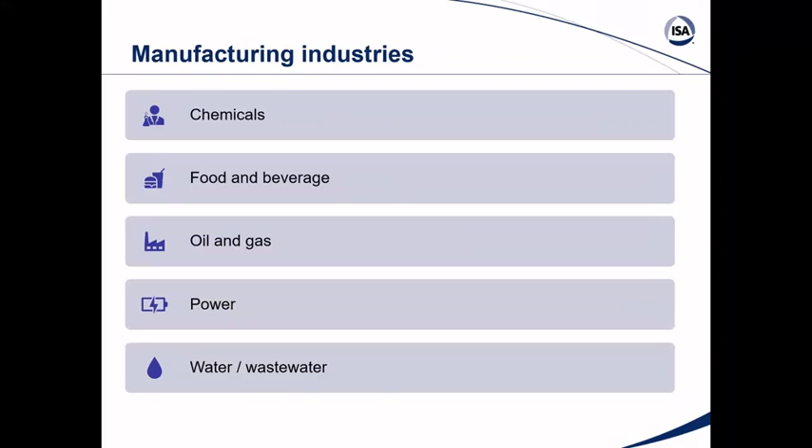We develop cutting-edge resources on topics like asset management, enterprise integration, control systems, cybersecurity, instrumentation, plant maintenance, and safety.

ISA certification provides an objective third-party assessment and confirmation of a person's skills. ISA currently offers 2 certification programs, Certified Automation Professional and Certified Control System Technicians. ISA offers 3 levels of the CCST certification, requiring differing degrees of technical experience, education, and training.

ISA also offers 2 certificate programs, the ISA IEC 61511 Safety Instrumented Systems Certificate Program and the ISA IEC 62443 Cybersecurity Certificate Program. The ISA brand family exists to serve automation professionals and their companies and includes Automation.com, the Automation Federation, the ISA Security Compliance Institute, the ISA Wireless Compliance Institute, and finally, the ISA Global Cybersecurity Alliance.

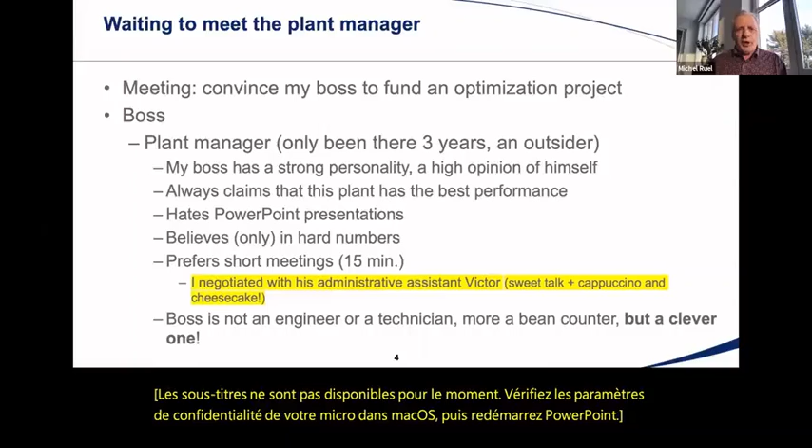I decided to present today differently, just so we change. We do so many Zooms, Teams, and so on that I wanted to do this differently. So what I will do is I will present a project to my boss. I am waiting for this boss right now. I want to convince him to fund an optimization project.

So the plant manager, Mark, is an outsider to our plant. He came here 3 years ago. He has a strong personality, a very high opinion of himself. He always claims that this plant has the best performance among our group. He absolutely hates PowerPoint presentations. He believes only in hard numbers. He prefers short meetings, usually 15 minutes.

So I convinced his administrative assistant, Victor, with a sweet talk, cappuccino, and cheesecake to get 30 minutes with him today. My boss is not an engineer, he is not a technician. He is more like a bean counter, but a very clever one.

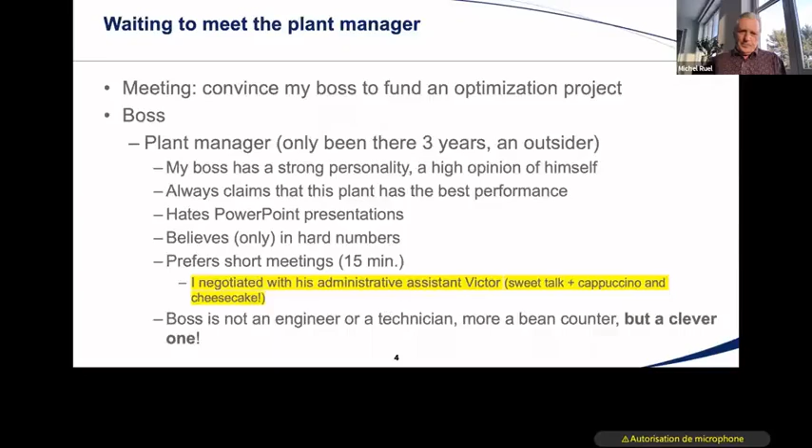So with him, you have to go straight to the point. You have to be prepared. If you present a PowerPoint, it has to be very short. No technical words, no buzzwords, no acronyms. He especially hates control loop, PID control, advanced control. So with him, I stick to simple words like control system.

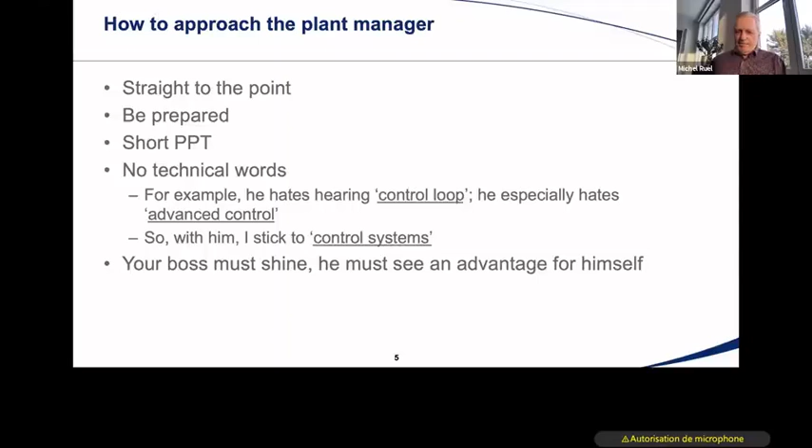Then, when you present a project to your boss, he must shine. He must see an advantage for himself. So just myself in this plant, in my role today, I am the process control engineer, I am the quality manager, I am the instrumentation team leader, I am the electrical engineer, and so on. Many hats, but process control is my baby.

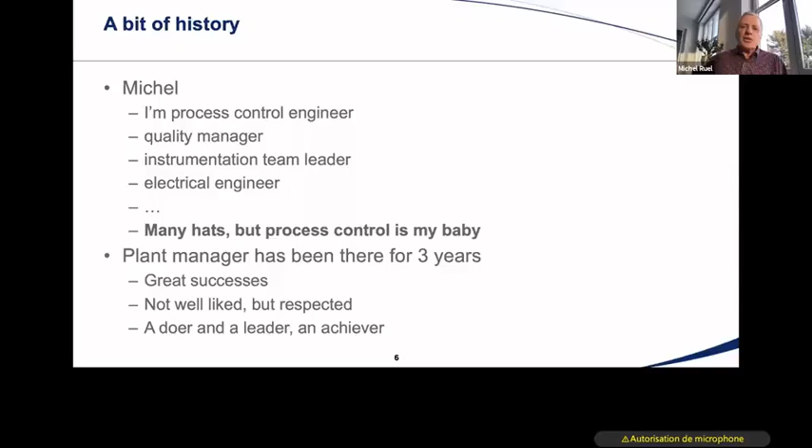So the plant manager, like I said, has been here for 3 years. He had great successes. I will not say he is well liked, but he is respected. So he is a doer, he is a leader, he is an achiever. That's the type of person I will be discussing.

Now, you will see on the slides what I have in mind, what I plan. My boss will not see this. My boss will hear what I am telling him. But you will see on the slides what I have in mind.

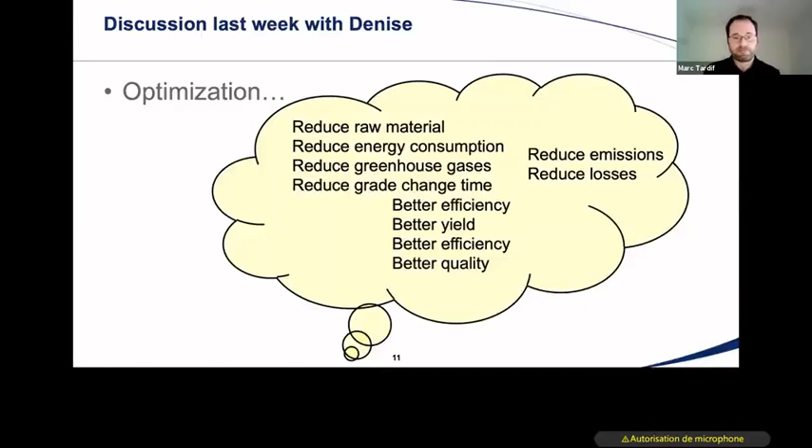Yeah Michel, that's all good questions, but we've been there, done that already. Yeah, but you promised me 10 minutes, so let me present my idea. I had many other questions, but Denise told me, you know what?

We discussed optimization and I thought about our grade changes. Since 2019, we are producing smaller batches, so we have to change grade in the furnace more often.

And during each grade change, we are losing production. The quality is off spec, so we have to reprocess that material. Every grade change, we have between 65 and 75 minutes of losses in production. If we can reduce this time, it will be pure profit because we will produce a little bit more, less manipulation, less reprocessing.

Well, that's easy to tell, but can you prove what you claim? Can you put numbers on your nice story? Can you come back to me with a precise project that I could present to our head office?

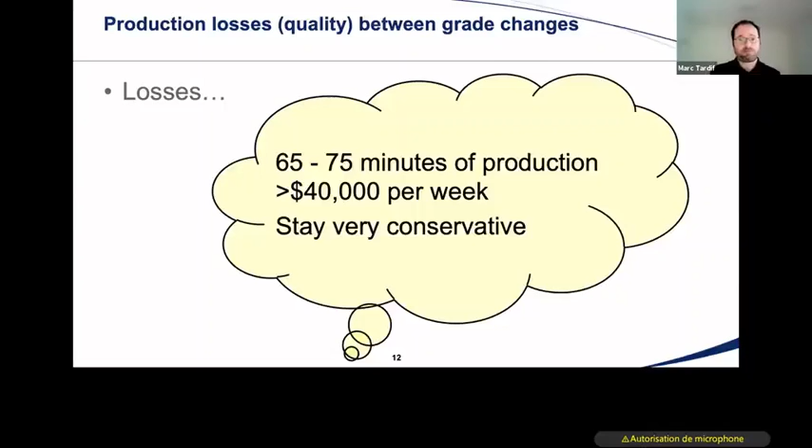Boss, we have been working together for 3 years now. If I come to you, I already have the numbers, I already did the math. So if we can reduce the grade change from 50 minutes to 25 minutes, we will reduce the losses from 30,000 to 15,000.

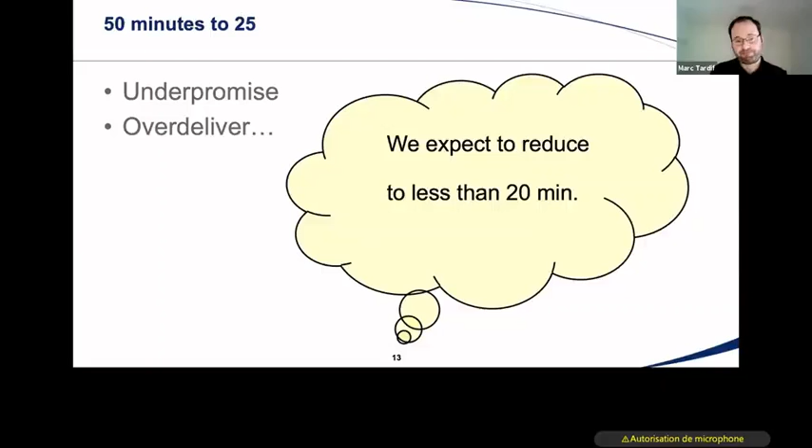Yeah, but why has it not been done before, Michel? Can you tell? You know what - few people, few managers, few process engineers understand process control. Remember, this is my bread and butter, this is my baby. I know simple tricks, very simple tricks.

For example, if you know the dead time for a process, you can predict the settling time for this process. Michel, I have no clue what that is. My understanding is that right now it's dead time for me - I have no clue about settling time, dead time, and all that stuff.

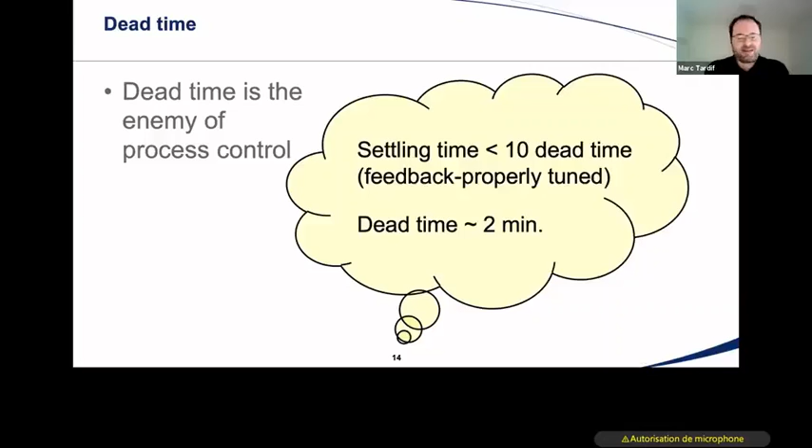Let me explain something very simple. I know that you like biking. So when you ride your bicycle, when you start to pedal, you have like 1 second, maybe 2 seconds before you initiate the movement. This is like inertia, this is what I call dead time. What I call settling time is the time to reach a steady state.

For example, when you ride your bike, you start to pedal. After 1, 2 seconds, you start to bike. And after like 6, 7, 8, 9 seconds, everything is settled - so that's settling time. That's how I based the basics of the estimate to improve the furnace.

So the inertia, the dead time for the furnace is like 2 minutes. If we can improve the tuning using properly the equipment already there and adding a little bit more information to the system, like feed forward or so on, we could improve the system.

Yeah, but just don't try to embarrass me with magic words and numbers. Sorry, boss. So what type of car do you drive?

Well, you know, I have this nice Mercedes AMG. Okay, so you have an intelligent cruise control on this Mercedes. Yeah, sure, sure. This intelligent cruise control, what they did, they use a cruise control system and they added more information to it, like LiDAR, cameras, and so on.

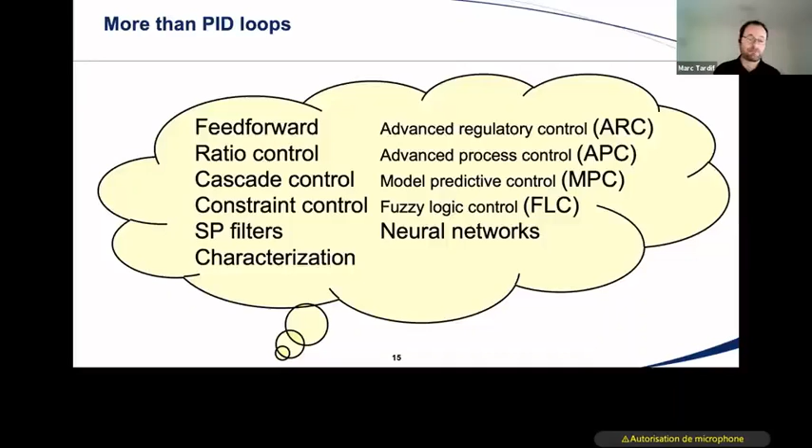Okay, okay, I understand. But please don't tell me that you will ask for new material or fancy programs that nobody will understand. No, boss, nothing like that.

So what I have in mind is very simple. We will measure actual performance. We already have the data, we don't have to add anything to this. We will do a project, which is process control optimization to optimize production. After that, we will measure new performance. We will compute generated profits, and then I will compute my bonus.

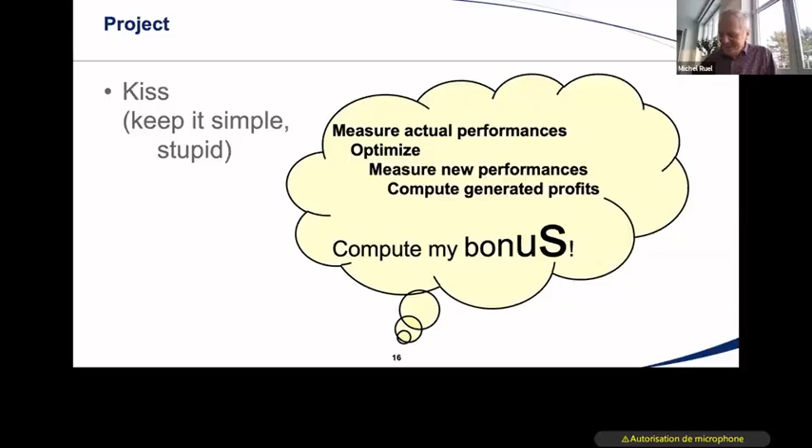Your what? Bonus? My bonus, let me explain. So if this project is successful, we will generate like 15,000 per week. You will shine, the production manager will shine, the head office will be very happy. Nobody will know about me and my team. So we will work behind the scene. So maybe forget the bonus, just an increase in my pay, and I will be happy.

Okay, okay. Well, Michel, you had my attention, as I understand it now, you're trying to present a PowerPoint. You know that I don't like PowerPoint. I know that you may call it a presentation or anything, but I know it's a PowerPoint. It's a nice trick, but it's been there before. Okay, so will you agree on a 10 slides PowerPoint, no visual effect, nothing fancy, as plain as a financial report? Okay, okay, go for it.

Okay, so now I have the same presentation for Denise, Tim's, and the others. So, boss, don't be surprised. You will see a little bit of technical words, but I just wanted to use always the same presentation. If you don't understand some words, just don't look at it. So the numbers and estimates are very conservative.

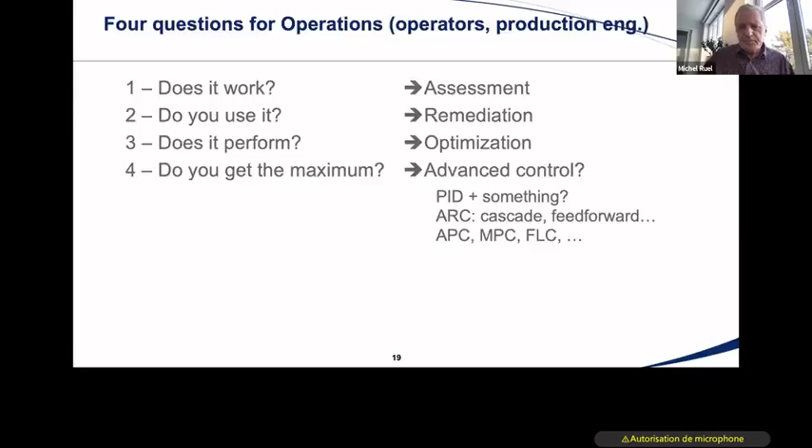In our project here, it's very simple. So the project is, we have 76 pieces of equipment to look at: transmitter, valve, variable speed drive, and so on. And we will do this in the maintenance budget. We did not calculate an extra budget. Believe me, boss, I am also responsible for this budget. At the end of the year, I won't ask for an extra budget.

We already have the budget to do it. Now we have 11 loops and control strategies. The preliminary work in our case is very small. In some projects, we will need 2, 3, 4 weeks to prepare the project. In our case, we have been working on our documentation system and our historian in the last year.

Especially because you asked always for good data. So our historian is in good shape. All the signals are scanned once per second, no compression. We have the real signal all the time. Our documentation system is updated. Our P&ID are updated. Our standard operating procedures are in order.

So we are, I would say, not lucky, but a little bit lucky because we did our homework in the last years. Now the assessment: 75 hours to review each piece of equipment, 140 hours to remediate, repair, calibrate, configure, and 33 hours only for optimization.

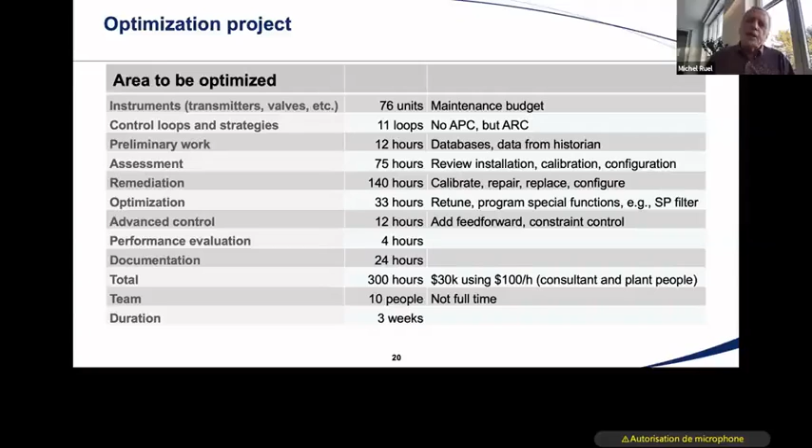So the material, we will replace 1 valve, 1 variable speed drive, repair a few instruments, again from the maintenance budget. We have 1 consultant to coach us to ensure that we do the right steps at the right moment, 30 hours. I asked Denise to have Tim with us.

Tim is our best trainer. Tim will be the salesman to the production people. He will work with the operator. He will work with the production engineer to ensure that they work with us, they understand what we do, and they will buy the project.

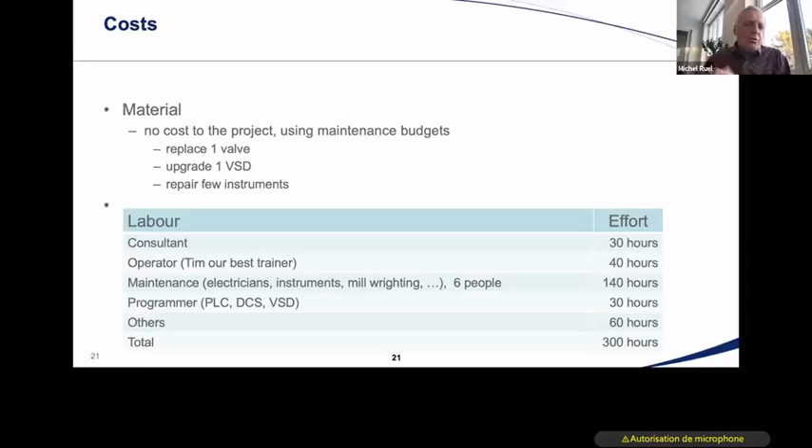So we need a few maintenance people, a little bit of programming, others, total 300 hours. Now the preliminary work, that's why I said we are a little bit lucky because we are very well organized here. We did projects in other parts of the plant, or in another plant, where it was not the case, and it was really a pain to just collect all the documentation, all the data.

In our case, we are very well organized. So we will prepare a database for the assessment, for the remediation, for the optimization. We will document everything. At the end, we will update the P&ID, the management of change, and the SOP. Everything will be done properly.

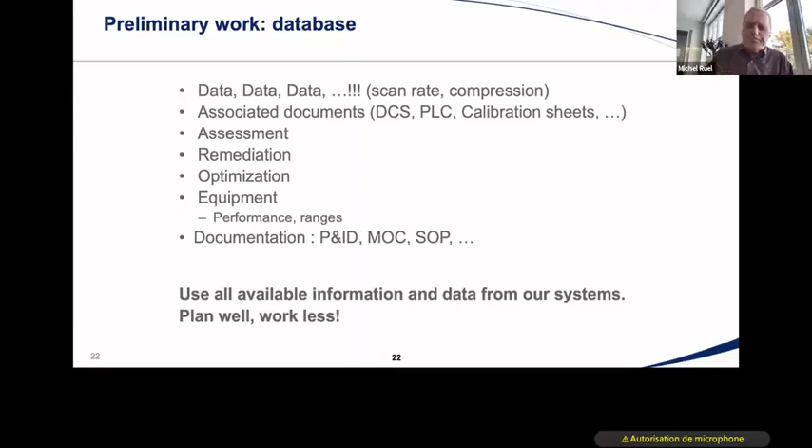Then we will do the assessment. The assessment is visual inspection, configuration, analysis using historical data in the PI system, and analysis using special software. For example, for the flow meter, we have a program to analyze the performance of the flow meter.

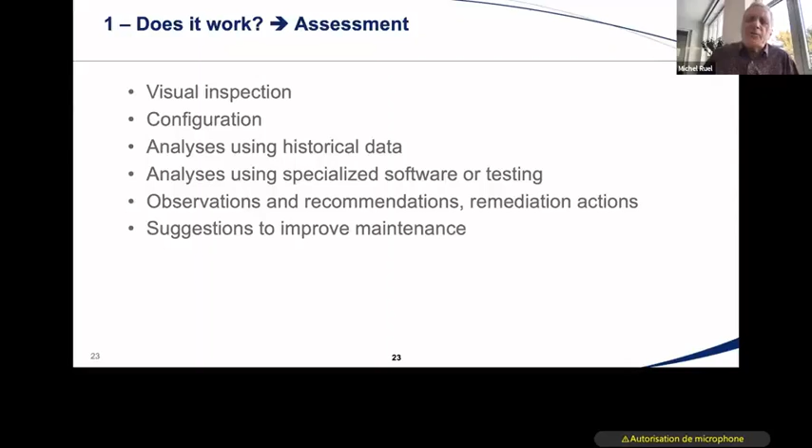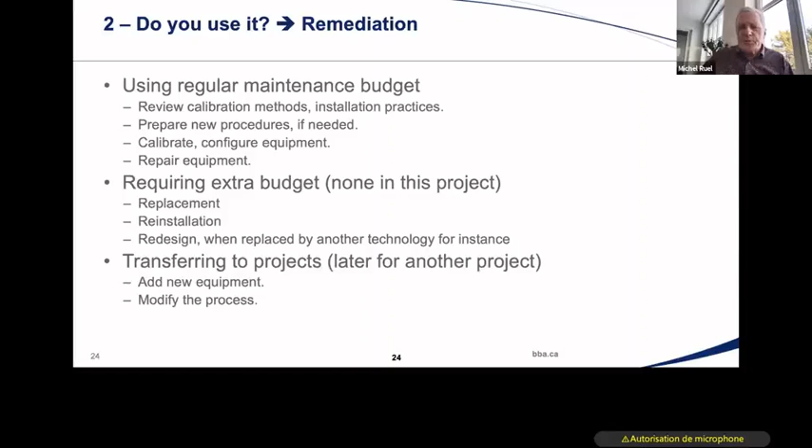So now optimization, we will select properly the criteria to retune the loop and work on this. Now we are a little bit lucky again. Every time we have a grade change, we change the set point in the system.

And a set point change is a disturbance to the process. With that disturbance, we have software to model the process and retune the loop. We won't have to bump test. We will just use the set point change. That will be enough. And since all the data is in the historian, we can even use the past and use a set point from 3 weeks ago to retune a loop, for example.

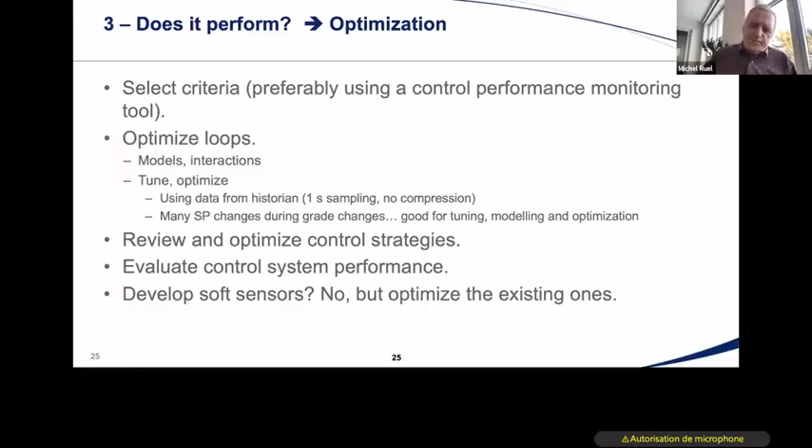We will review the control strategies. We won't develop soft sensors, but we need to optimize a little bit the 2 existing ones. And at the end, we will consider APC to improve, stabilize, handle constraints, and so on. We decided in this project not to add new advanced process control, but we will use advanced regulatory control, which is PID plus feed-forward, cascade, and constraint control. In our case, feed-forward and constraint control.

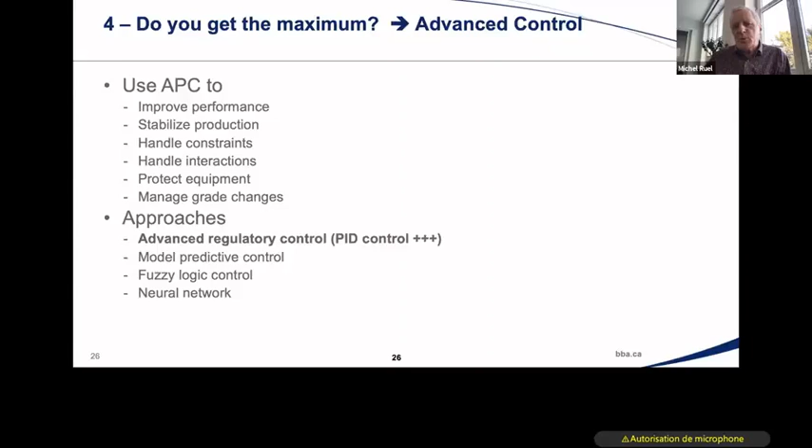Now, the most important step that people will neglect, we will not neglect: documenting properly everything, not only the documentation for the plant, but the performance measurement before and after. We will present results. I know we will be successful. We will spread the good news.

We will congratulate the team. We will write in the newsletter for the plant. We will write about this project. And if it's well planned, the results should be better than expected.

So, boss, what do you think? Well, that's good stuff, Michel. I really like that. You know what? I agree on the spot to let you execute the project, but you have only 3 weeks to do it, and then 3 weeks to evaluate the performance, and you start next week. So I'm out of here. Now, Michel, by the way, just remember that success has many fathers, but failure is an orphan. Good luck. Thank you, boss.

We'll do it. So, as you see on my PowerPoint, I was not planning to do it that quickly, but we will do it. So,

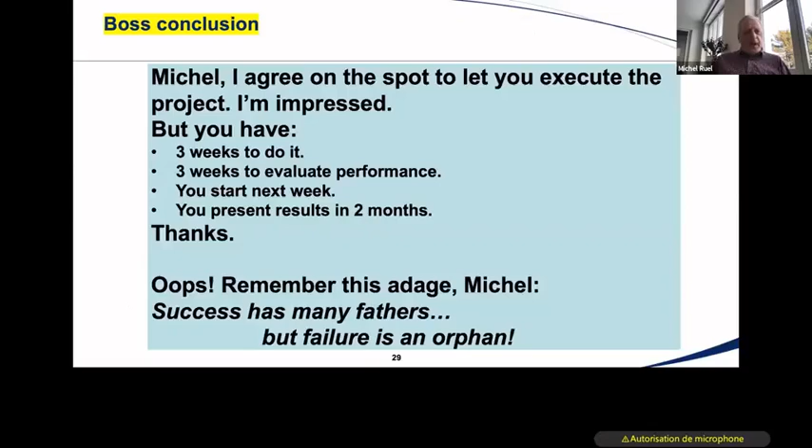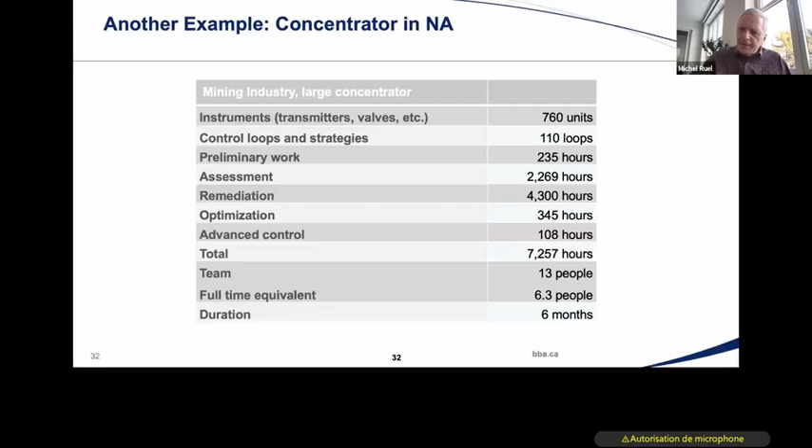Conclusions. I will present 2 other real examples that have been done in other plants, larger, bigger projects, but you'll see it's the same idea. In this project, it was like 7,000 hours, 13 people, 6 months. It was a whole plant that we redid like that. You'll have the PDF of this PowerPoint, so I won't go into detail on each.

This next example here is 40,000 hours. It lasted, in fact it was planned for 18 months. It lasts a little bit longer, but it's exactly the same steps, exactly the same idea. You have to have a very methodical approach.

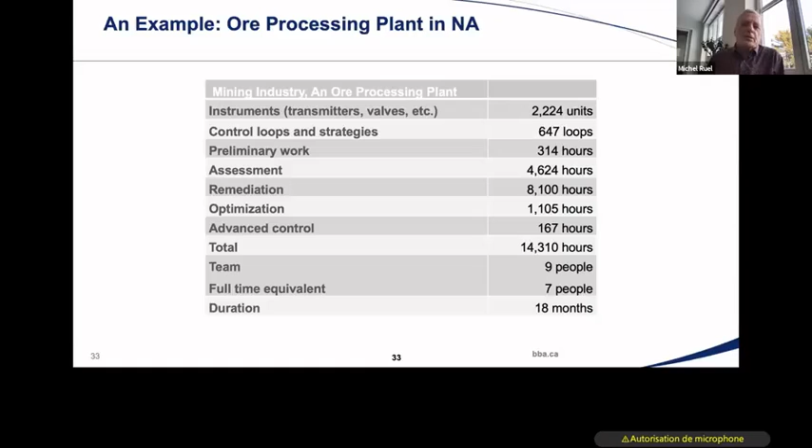So now, what is optimization? It could be to improve productivity and efficiency, higher yield, reduce unplanned shutdown, improve the stability of the operation. But if you do a project to improve stability, it's not easy to get hard numbers on this. So the first project you do in your plant or with your customer, ensure it's simple, easy to explain, easy to sell, but also easy to demonstrate the benefits.

It could be for maintenance, though again on the maintenance side it's not so easy to demonstrate the value, like equipment lasting longer, standardize management of control strategies, simplify troubleshooting. It could be from the energy and environment side: lower energy cost, improve yield, reduce emission, reduce consumption of raw material, improve safety. Improve safety is very nice, but it's not easy to get numbers for this. Same thing for quality: better quality, improve quality control, standardized procedures. It's not so easy to explain or present numbers from this.

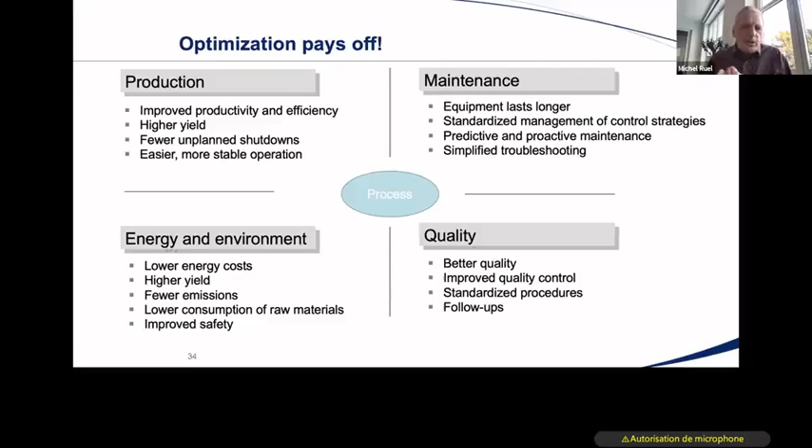So now remember, before adding new equipment, new software, new control strategies, it's a lot easier to optimize. A very simple definition of optimization is to use properly what you have in your hands. This is not expensive. Make it work and perform.

So step by step, 4 steps plus the preliminary. Do not underestimate documentation. Depending on the state of your plant, it could be really difficult, just for example, to retrieve the calibration sheet.

Communicate, explain. Don't be shy to present results. If you have a great success, don't be shy, don't be humble. It's time to present good results. If you want to sell other optimization projects, what you have in your pocket is your best sales weapon. So for the first project you do, be sure to have solid and convincing numbers. That's it. Question now.